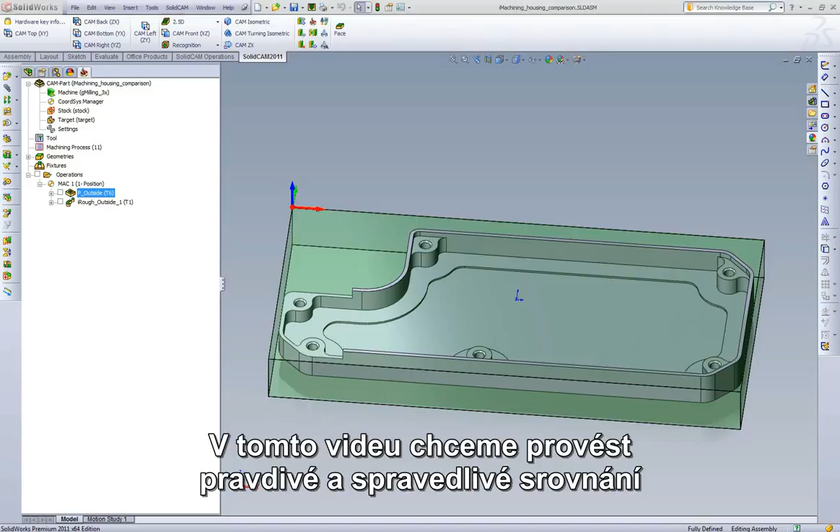In this video, we want to do a true and fair comparison of standard offset style strategies and the iMachining toolpath. And then we'll also compare the iMachining wizard and its feeds and speeds.

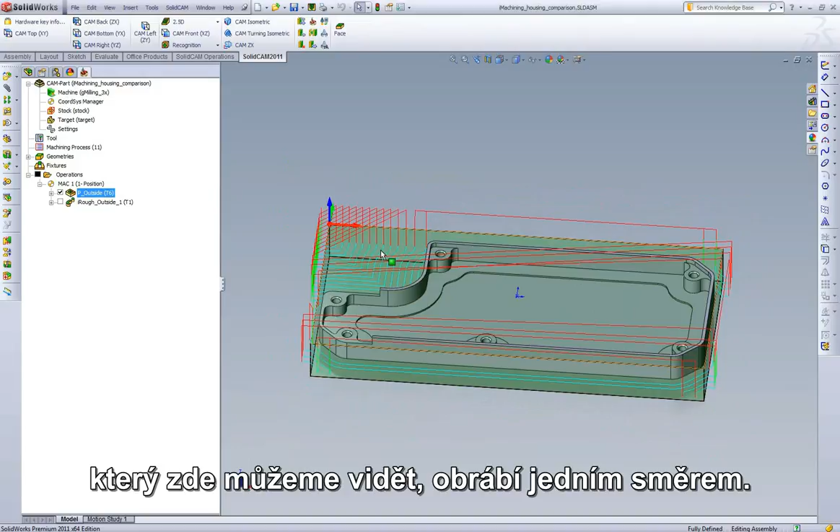What we have set up is a standard pocketing toolpath cutting the outside of our part. This is a standard parallel offset, as we can see, in one-way cutting. The second operation we have set up is an iMachining toolpath for that same geometry.

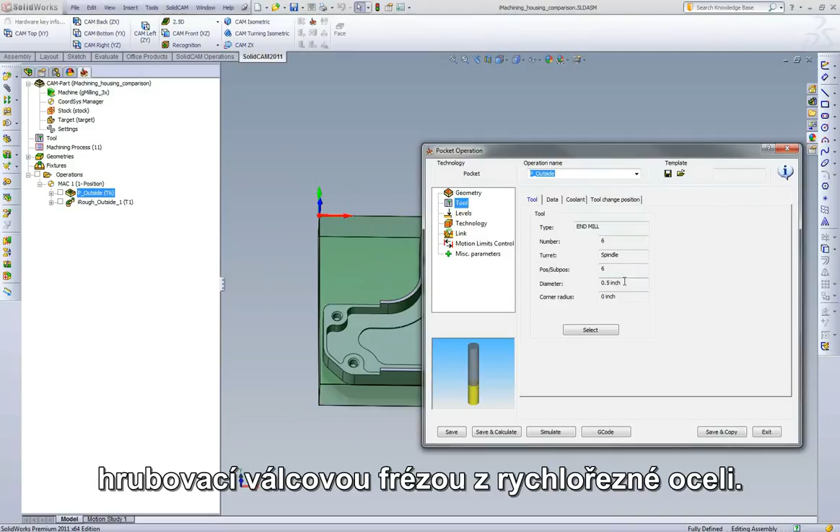So let's go to the pocketing toolpath and pick some real-world feeds and speeds. What we have here is a 1/2-inch, 4-flute end mill. Let's say we'll start out with a high-speed steel 4-flute roughing end mill, cutting steel. If we were to pick real-world feeds and speeds, assuming we're not doing high-speed machining, cutting steel, we'd probably run around 100 surface feet and pick something around 4 thousandths chip load. This ends up working out to roughly 760 RPM and a little less than 12.5 inches a minute.

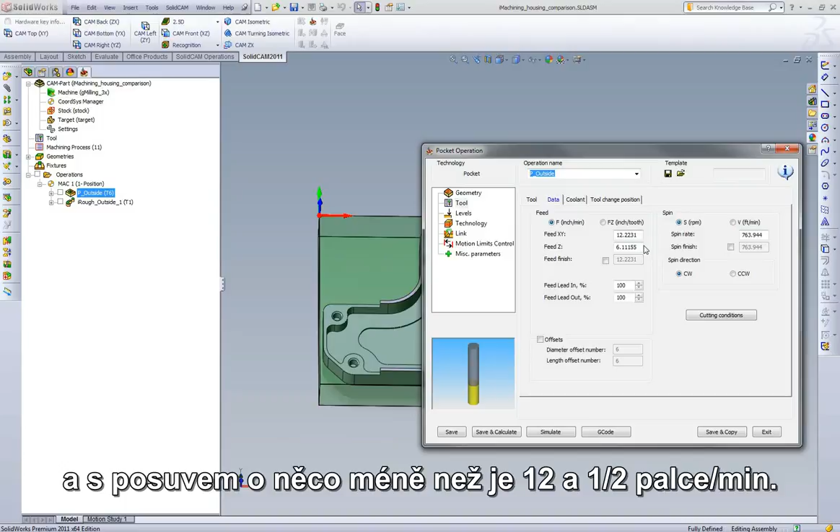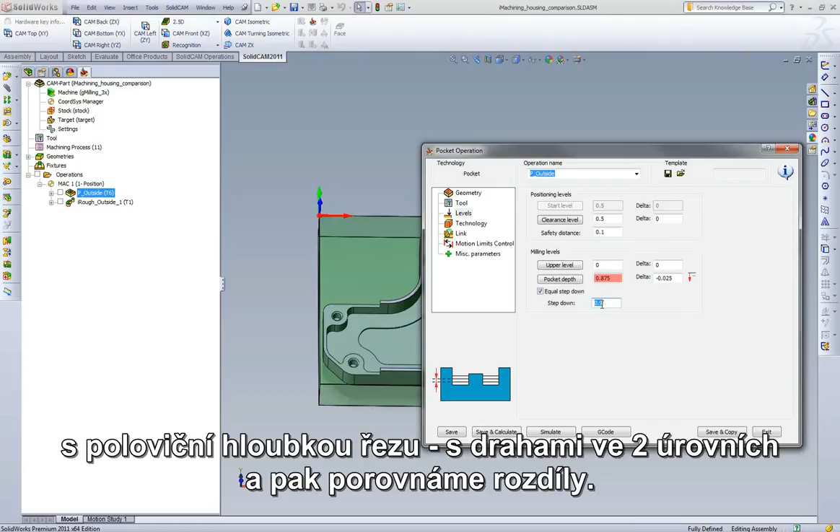If we were using a roughing end mill, chances are we'd be able to do this cut in one depth of cut. It's 875 thousandths, and we'd most likely get away with it. So what we'll do is compare the cycle times for this feed and speed at one depth of cut, and then cut the depth of cut in half and do it in 2 passes to see the difference. We are using a 60% step over on this part.

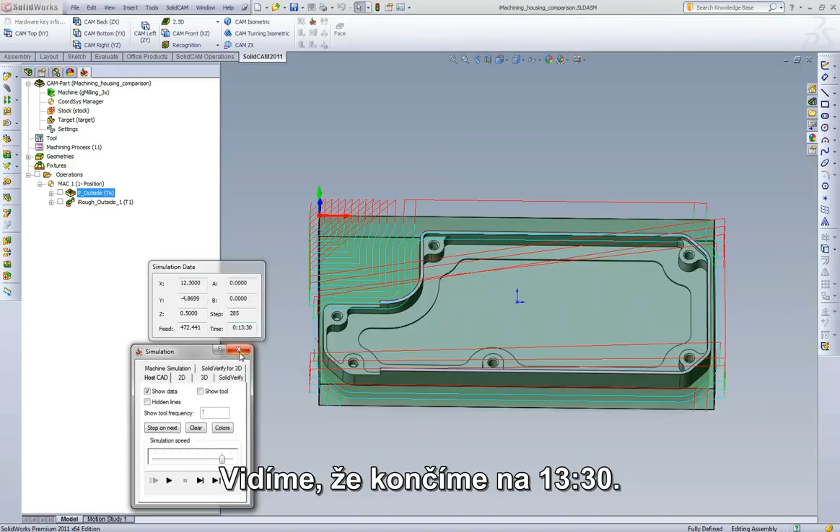So if we save and calculate and go to our simulation, we can see here we have our feed rates and our running time, and we'll just quickly play this toolpath. We end up with 13 minutes and 30 seconds, roughly 13.5 minutes.

If we were to change this cut and use, let's say, an equal step down and a half, which will give us 2. If we were to go and play this, we end up with almost 25 minutes worth of cycle time to machine this outside steel part.

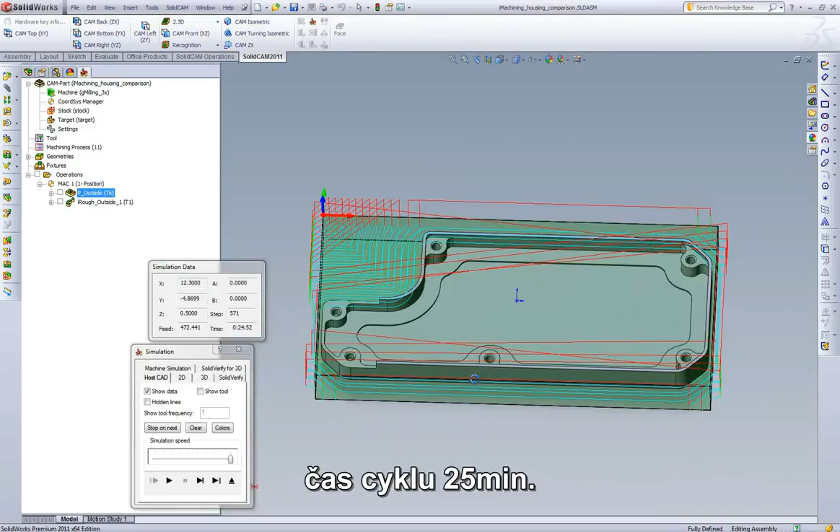To give you an idea of the size of the part, it is roughly 12.5 inches by 6 inches long.

Now let's go take a look at if we use those exact same feeds and speeds, the 763 RPM and the 12.5 inches a minute, with an iMachining toolpath. What are we going to get?

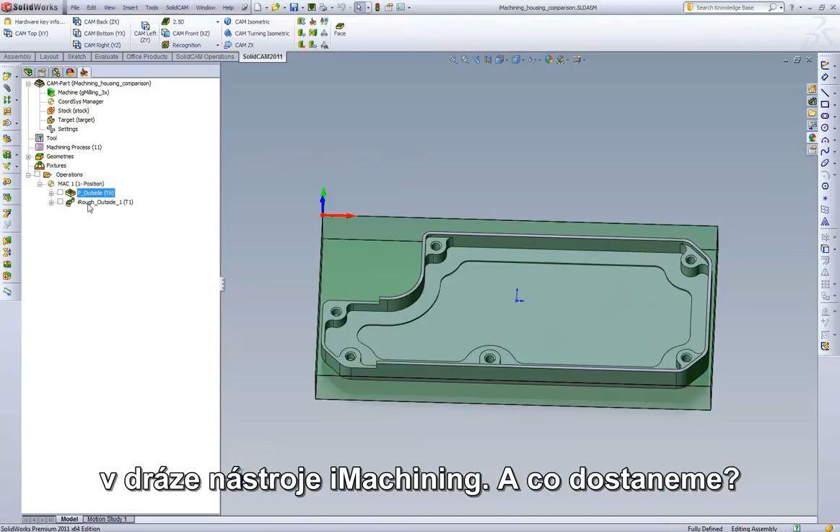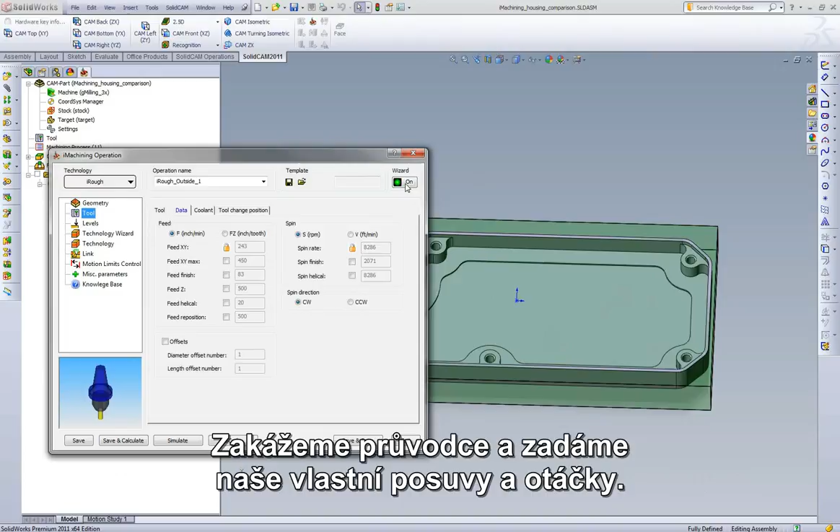Most high-speed machining toolpaths on the market today will tell you that most of their strategies need to be using high-speed feeds and speeds to be more beneficial than standard style strategies. In iMachining, we don't believe that. So what we're going to do is disable the wizard entirely and run our own feeds and speeds. We're going to pick an RPM of 763 and a feed rate of 12.5 inches.

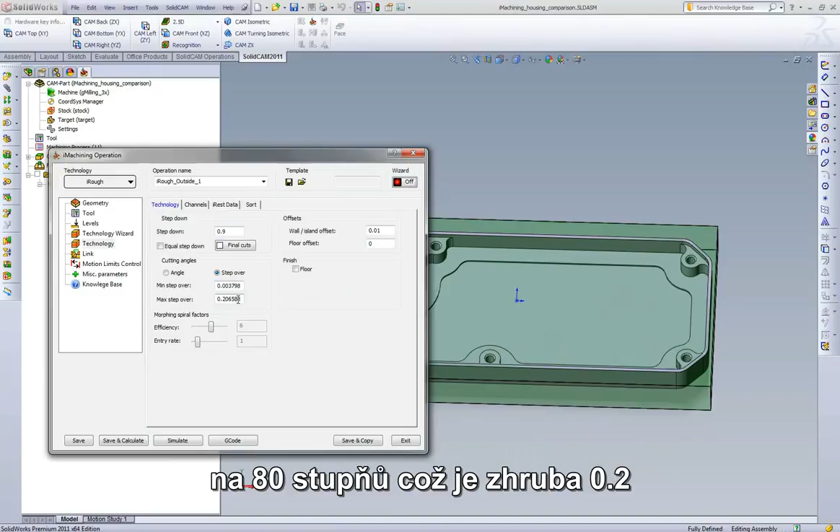Going to go to our technology. We're going to do one depth of cut. Since we're using a roughing end mill, we're going to maximize the step over, which at 80 degrees is roughly 200 thousandths. And since we're also trying to mimic what we get in parallel strategies, we're going to pick a bigger minimum cutting angle. We'll calculate this toolpath, run to our simulation, and we'll see what we get.

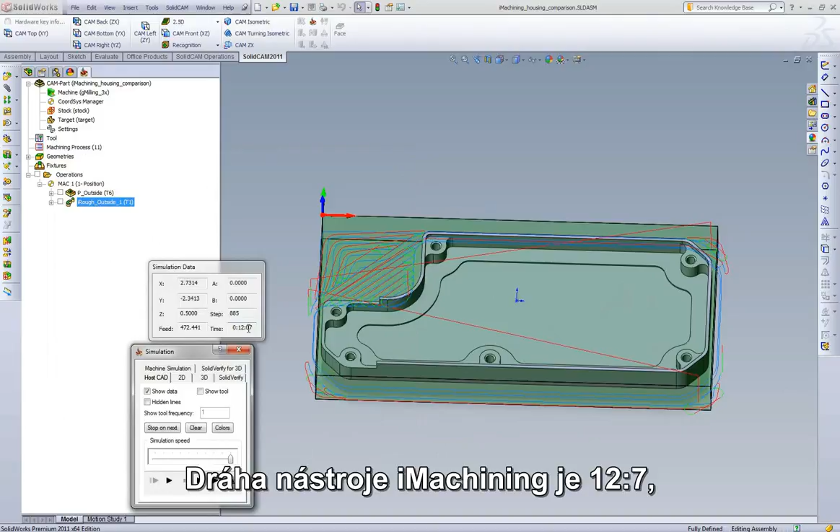We see the iMachining toolpath is 12 minutes and 7 seconds, roughly 1.5 minutes quicker than even the standard pocketing or offset strategy with the same step over, feed, and speed.

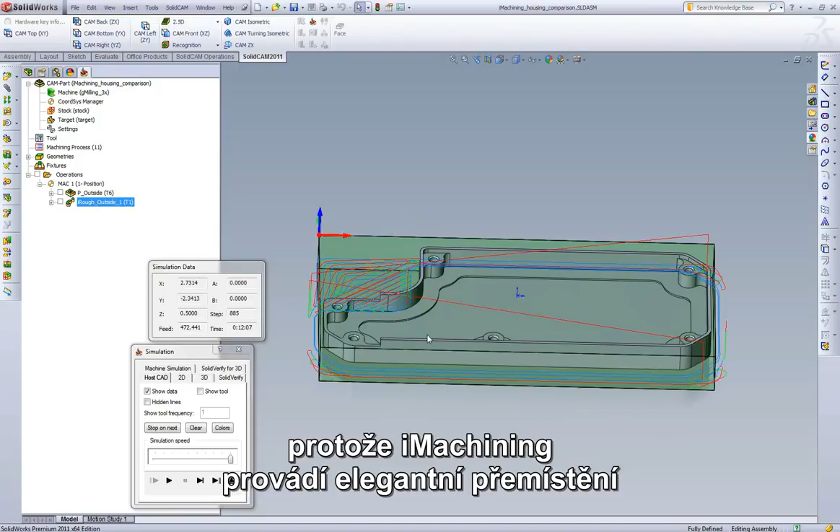Now, how does iMachining do this? It does this through a couple things. First, as we look at the toolpath, we see there's very little clearance and retract movements. Because iMachining is doing smart repositioning and always staying in the cut, as we look at this part, we're not wasting any feed Z moves, and we're not wasting any clearance moves. So you're getting a very big optimization just by keeping the tool down inside the cut the entire time.

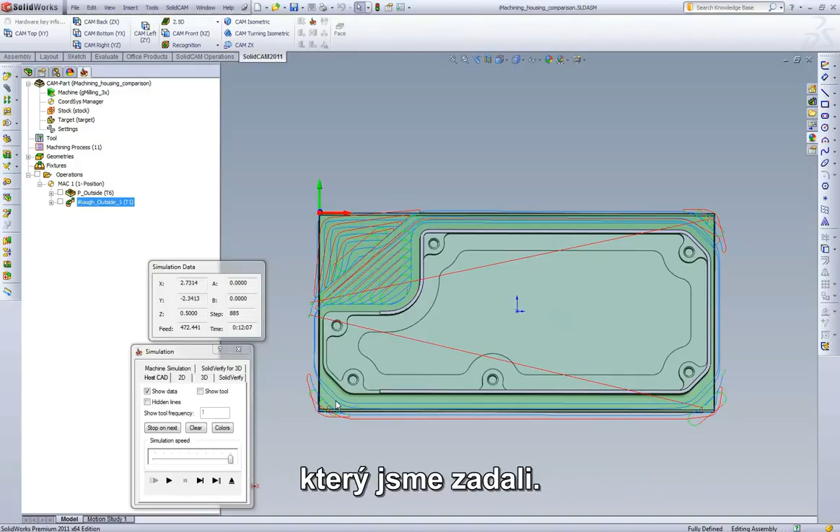The second thing we do is, we know we're not always going to achieve the step over that the toolpath asks for. And when that happens, we're automatically adjusting the feed rates to handle that. So even if we were to start single stepping this, we can see in the beginning as it's entering the cut, we have less step over. So our feed rate's actually a little bit higher, and it gets up to 17. As we hit the full depth of cut, you can see we're right at roughly 12.5 inches per minute.

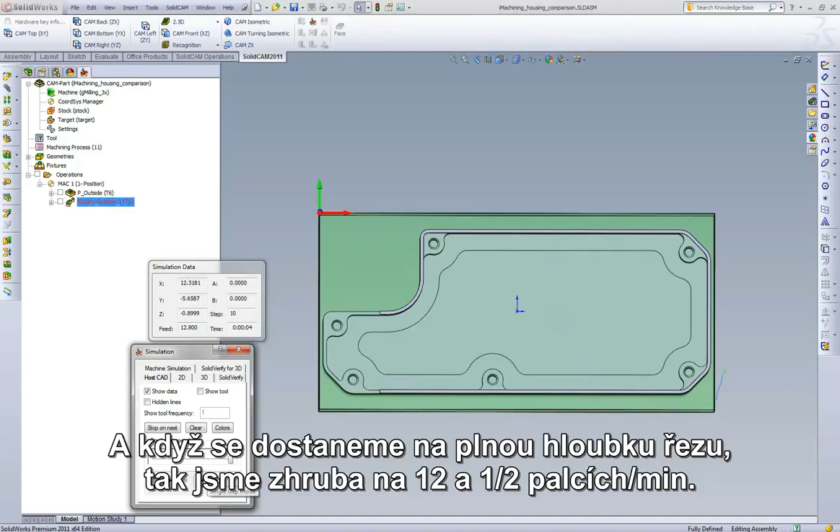So iMachining is being intelligent. It's getting rid of the repositions. It's staying in the cut the entire time, and it's adjusting the feed rate when the step over or the width of cut is falling below what we specify. So very efficient feeds and speeds, and you get a very nice toolpath. This is also going to be better for the tool in the long term because the tool's staying in the cut more.

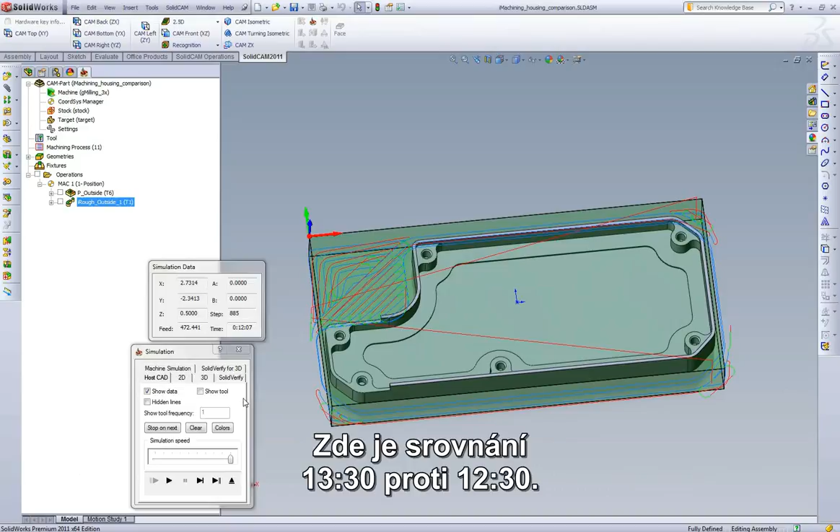It's not entering and exiting as much as it would with standard pocketing or standard offset cutting. So this is a comparison of 13 minutes, 13 and a half, to 12 minutes. Not a huge difference, but even using the same feeds and speeds that any shop is used to, we're going to see a benefit with iMachining.

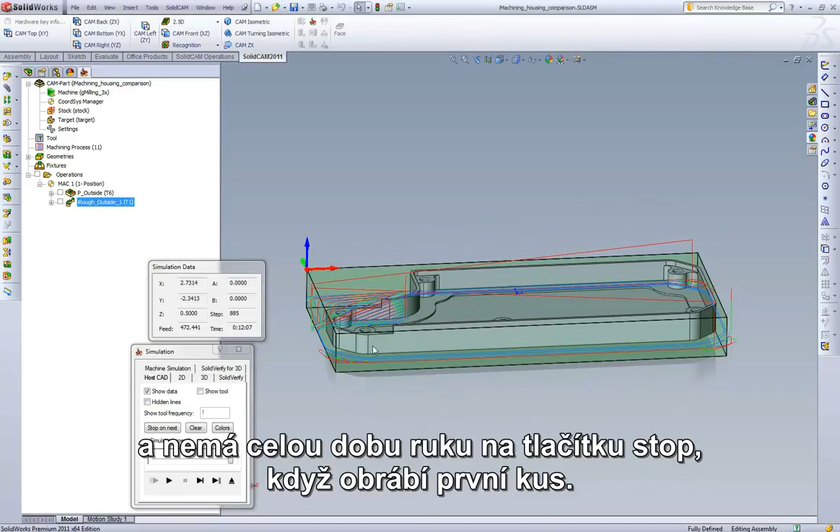And not to mention, when the tool path is running out on the machine, as an operator you're going to feel much more comfortable not having all of those Z clearance retracts and plunging all the time with your hand on the cycle start button when you're running the first piece. So iMachining also gives you a better feel at the machine because the tool path is staying down and it's cutting more intelligently.

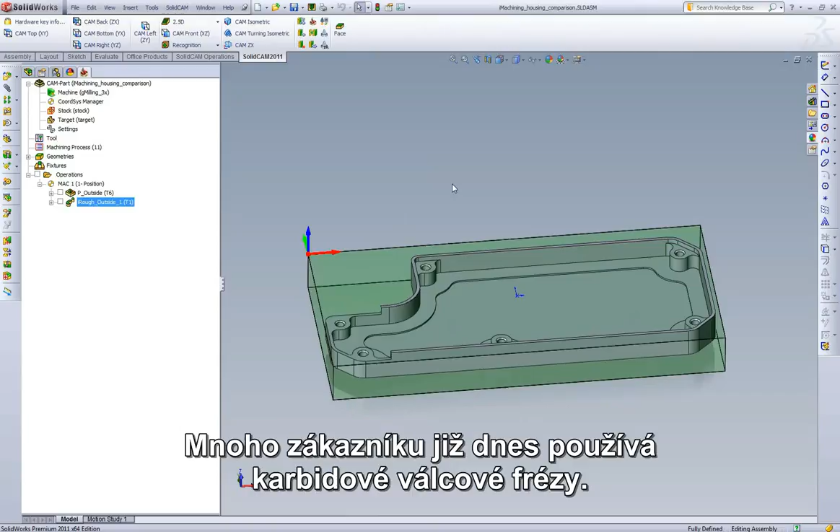Now let's also take a comparison of what happens if we were to try and do, let's say, high-speed machining with a carbide end mill. Our customers are using high-speed or carbide end mills today. So let's say we went back to this pocketing end mill. We're still going to use a 1/2 inch. We're going to still pretend it's a 4-flute carbide end mill.

Now we're going to switch things up a little bit. Most likely if we're running carbide end mills in steel, what we're going to do is run more surface footage. And then we're also going to run shallower depth of cuts because we're not going to take the full 900 thou at that step over.

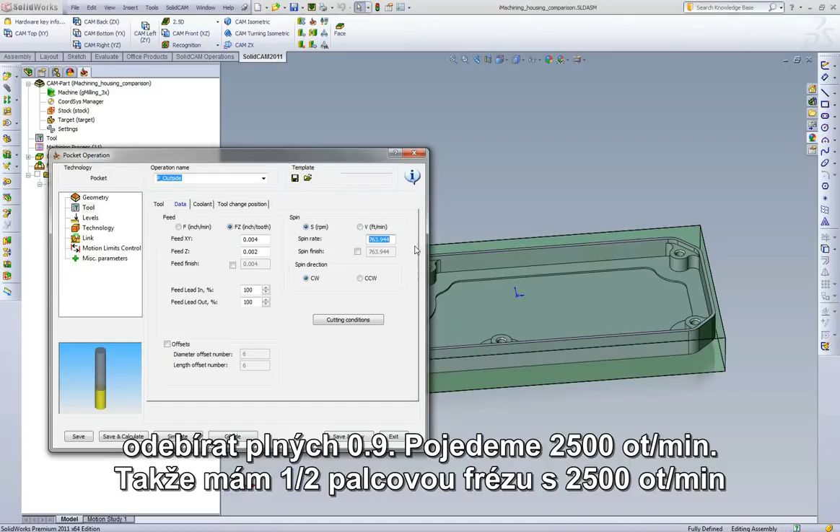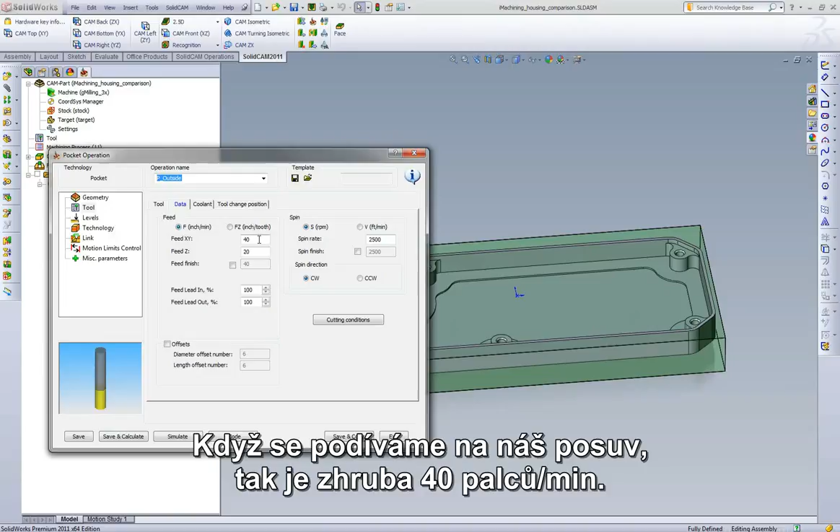So let's say we want to run something like 2500 RPMs. So a 1/2 inch end mill at 2500 RPMs works out to 330 surface feet, which is a little on the high side for steel, but for people doing high-speed machining in steel, really not that high. Definitely doable. So if we look at our feed rate, we get roughly 40 inches a minute. So 2500 RPM, 40 inches a minute.

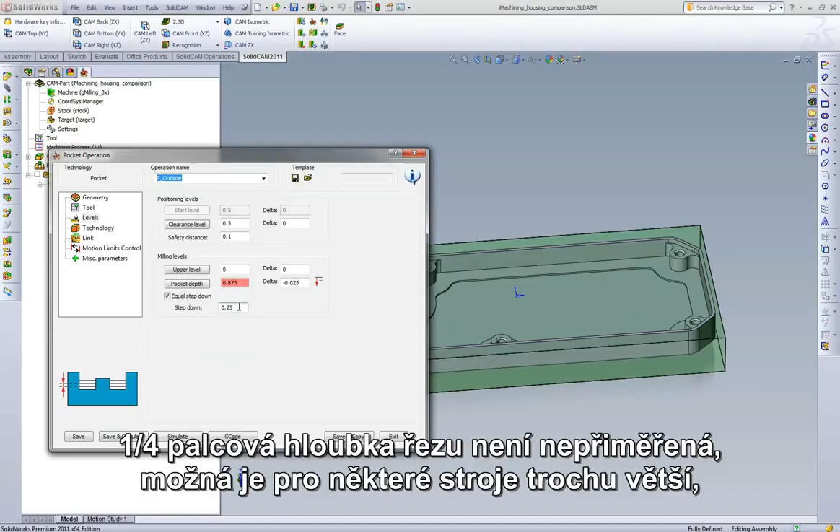We'll go to our levels, and what we're going to do is pick a 1/4 inch depth of cut. I personally feel that's a little heavy with a 4-flute 1/2 inch carbide end mill, but it really depends on your machine, the rigidity, the holder. So a 1/4 inch depth of cut is not unreasonable. Maybe it's a little high for some machines, and even other machines might be able to go a little bit deeper for sure. So let's calculate this tool path, and we'll see what cycle time we get.

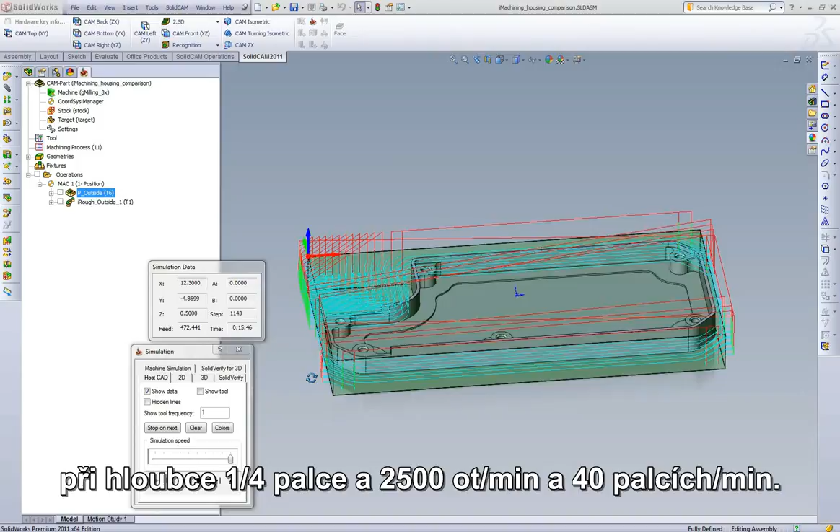So if we see here, we're sitting at 15 and a half, almost 16 minutes. So this is a cycle time at a 1/4 inch depth of cut at 2500 RPM and 40 inches a minute. We can see basically the same tool path we had the first time. Now we're just trying to go with a little shallower depth of cut, more RPM, higher feed rate.

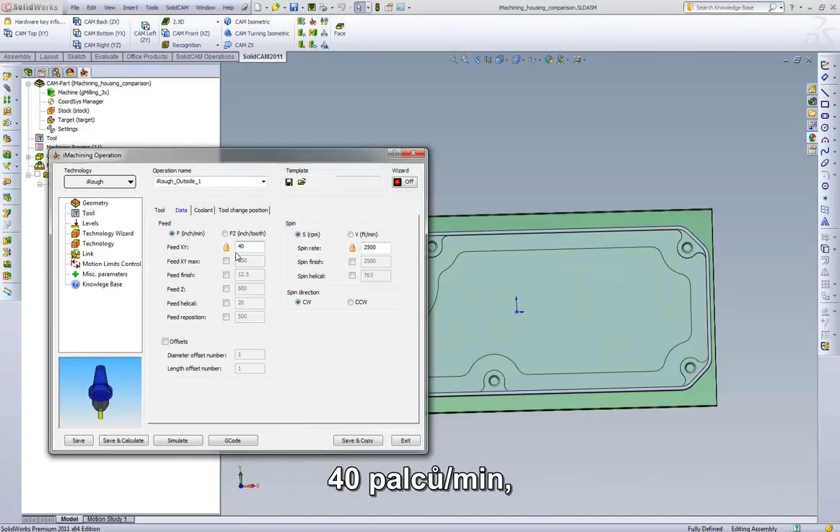Now let's go to the iMachining toolpath, and we'll do the same thing. So we'll go to Tool. We were running 2500 RPM. We're running 40 inches a minute. We'll also mimic the same step over, so we'll pick a 1/4 inch equal step down, and we'll calculate the toolpath.

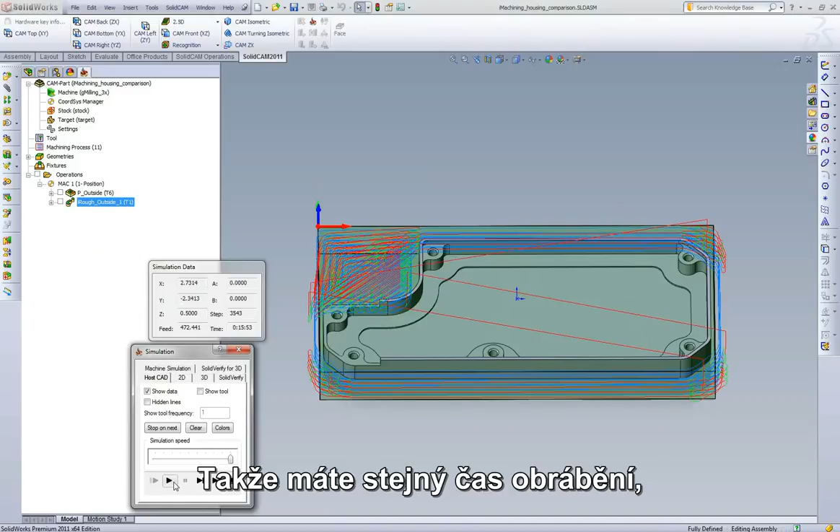15 minutes and 53 seconds. So basically you got the exact same cycle time going between standard pocketing with high-speed machining and iMachining. Yet we're keeping the tool in the material the entire time. You're getting less wear from the tool entering and exiting, and it's also doing smart repositioning.

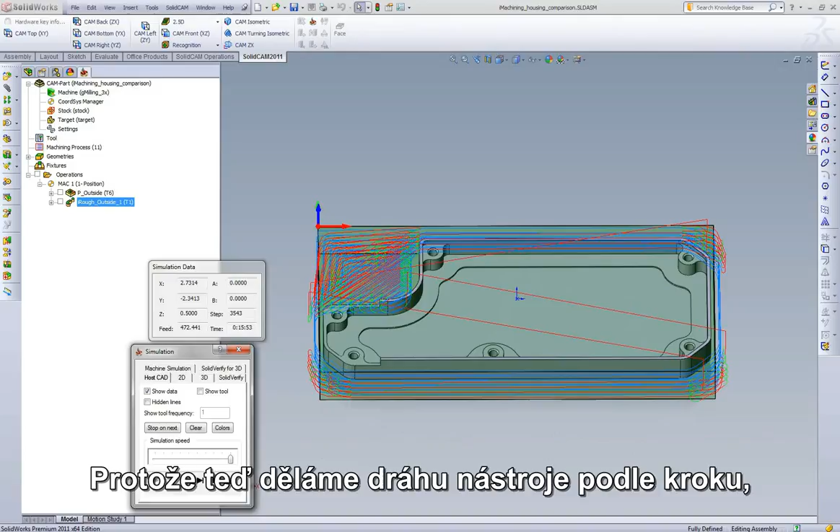Now let's do some comparisons on what iMachining's wizard would tell us to run. Because now that we're actually doing step over control toolpath, we can take this thing in one depth of cut. Not a problem at all.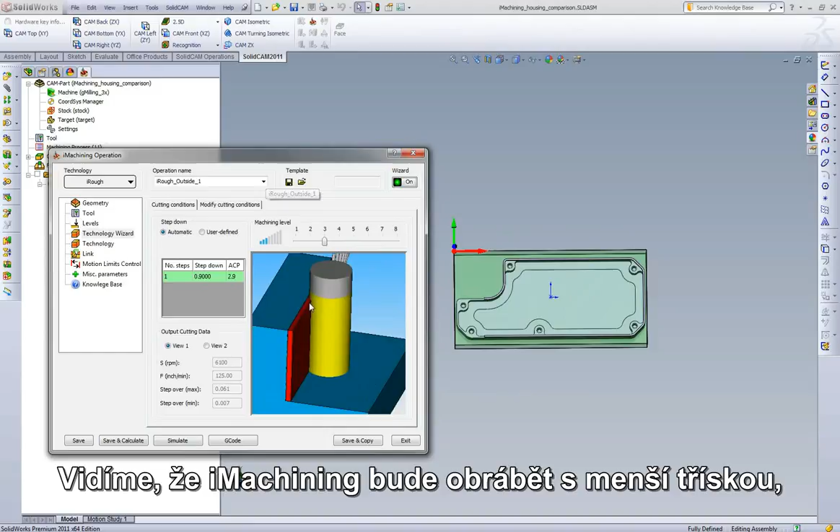So we're going to turn the wizard on, and we're going to take a look and see what the wizard generates. First, let's not go all the way up to level 8. Let's say we're trying to be a little conservative, and let's step down to level 3. Now, when we step down to level 3, a couple things we're going to notice here. iMachining, unlike what we were doing with standard pocketing, is going to do a smaller radial width of cut.

This is because now we're doing full depth of cut, so we want to shorten up the width of cut, that way we're not getting into a heat condition. When we're also doing this, we're going to adjust the feed rate for chip thinning, so we're running a constant chip thickness. Now, iMachining does some different things than what we do in standard pocketing.

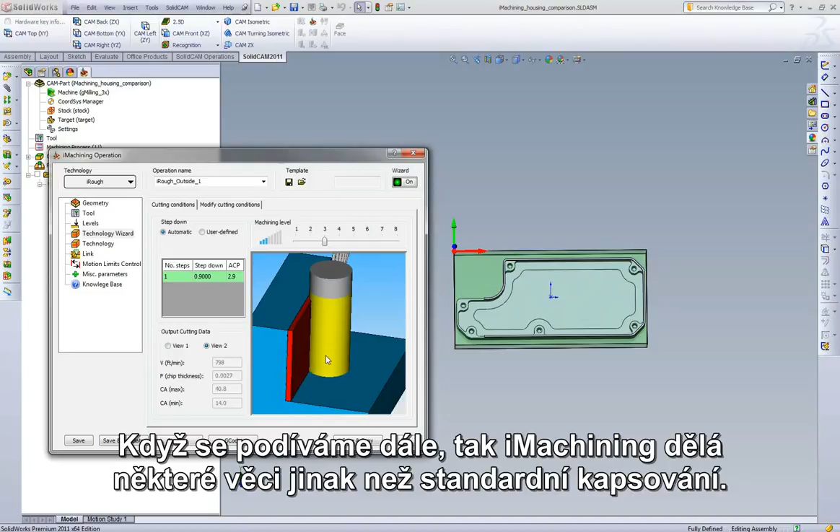When we're using carbide end mills, we're going to try and hold 2 thou and 7/10 of a chip thickness. So what this means is at the 61 thou step over, the 125 inches is going to meet that 2 7/10 chip load.

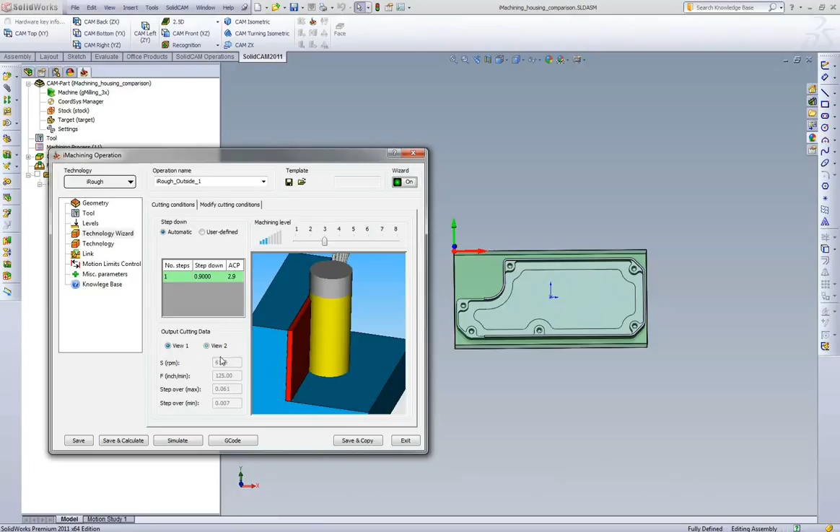Now iMachining is going to run up to 6100 RPM. This is going to be no problem with iMachining at all. The biggest reason, as we know with standard offset style strategies — when does the tool make the most heat?

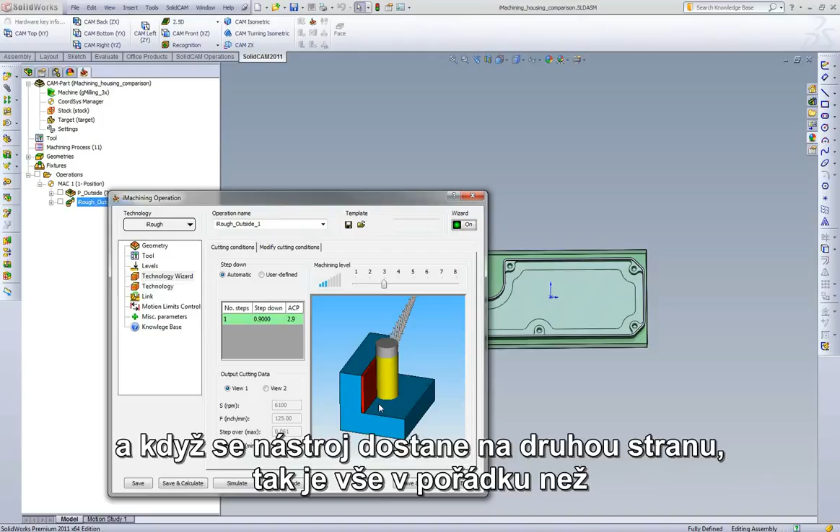When it goes into the corners. We've all seen as the tool path runs into the corner, you can see it smoke up. We've all basically had the coolant just dripping on it, and we know as it's cutting around the outside, it's nice and fine. As soon as it goes into a corner, the tool starts to smoke and the coolant evaporates, because the heat generated in the corner is what's dictating the entire tool path for us.

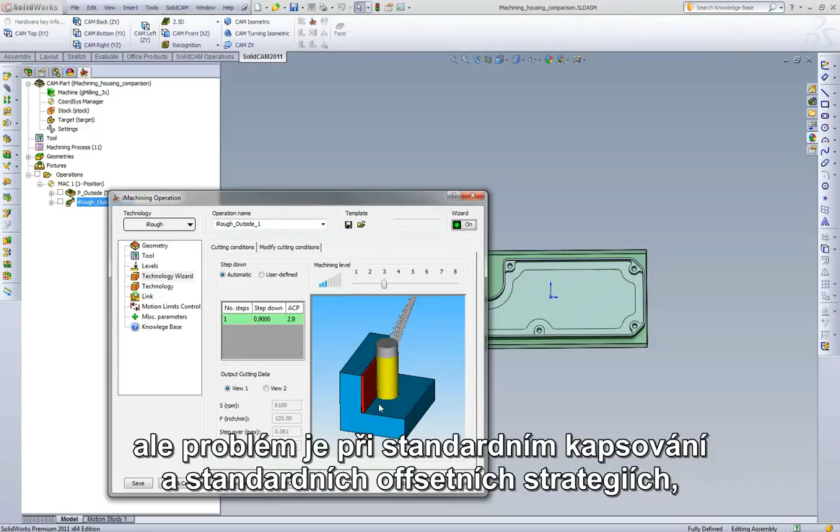Even though we knew if we were running in a straight line, we could run 6,000 RPM in steel, that wouldn't be an issue — not at this step over, not at that depth of cut. But the issue is, in standard pocketing and standard offset style strategies, we're getting too big a step over in the corner, chip thickness is going through the roof, and we're slowing down the entire tool path because of it.

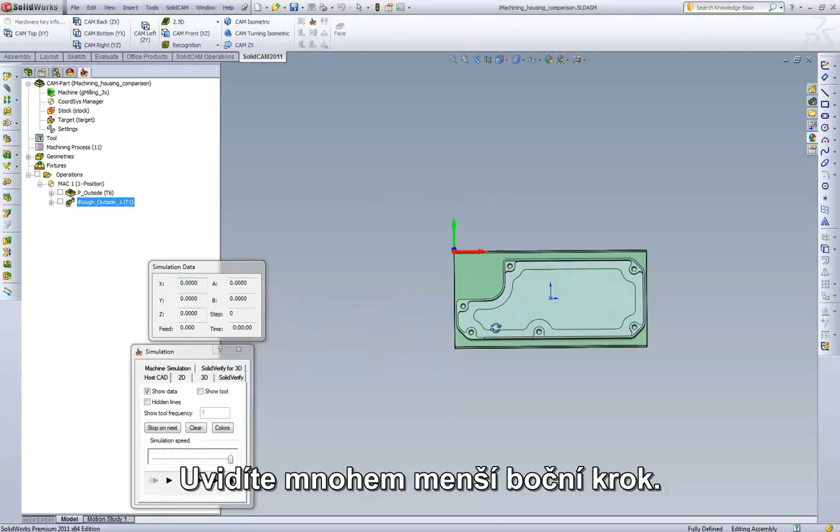So if we looked at what iMachining would do for this strategy, at this step over, we'll see what time we get. Now what we're going to see is, one, you're going to see a lot smaller step over. But we can see what happens — we go all the way down to 4 minutes of cycle time with iMachining.

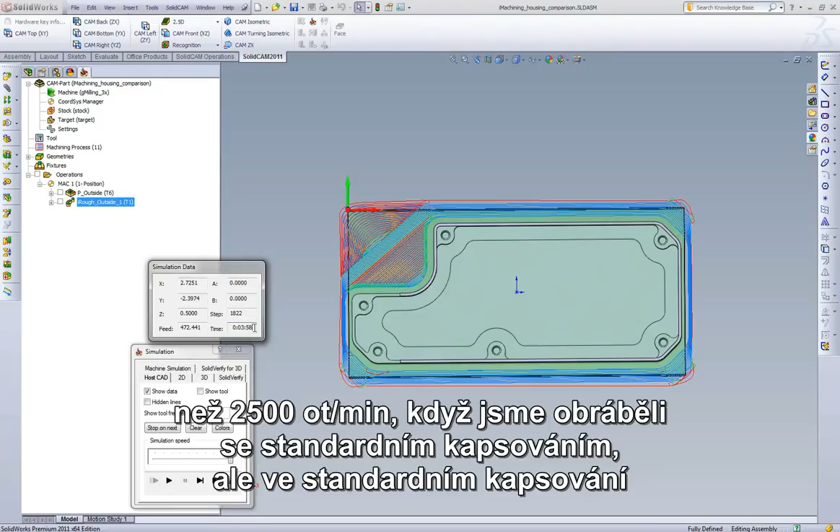That's still a very, very conservative feed rate and RPM with iMachining. We do have to remember, this is much higher than the 2,500 RPM we were running in standard pocketing, but we're limited in standard pocketing and offset strategies because of the corners.

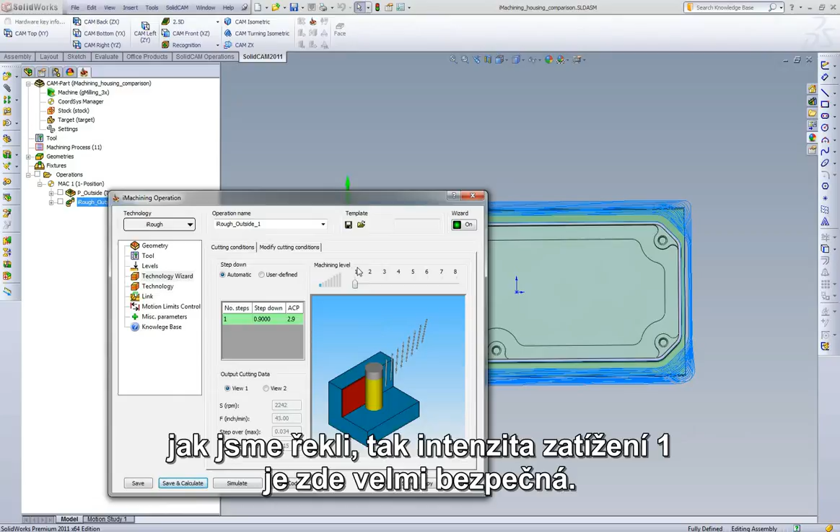Now, even if we were to take iMachining down to, let's say, level 1, which would get us down to roughly that 2,500 RPM range, a little less. As we say, level 1 is here to be very safe. This works really good when you have a part that's maybe hanging out in there and you really don't have a lot of clamping force, or your tool is hanging out very far.

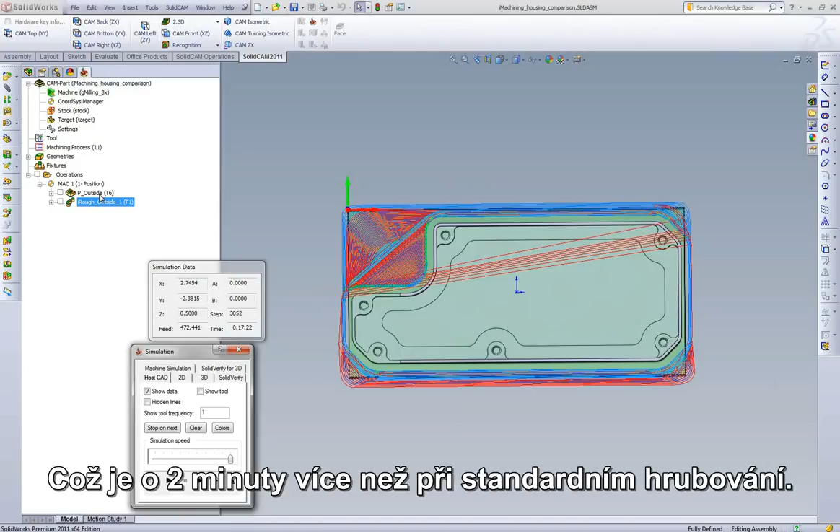Now even if we do this, we see we get the 17 minutes. So that is 2 minutes more than what the standard rough cut did with the standard offsetting. Yet we're actually still running a little less RPM and feed rate than we were in the pocketing, because this is only 2,200 RPM as opposed to 2,500.

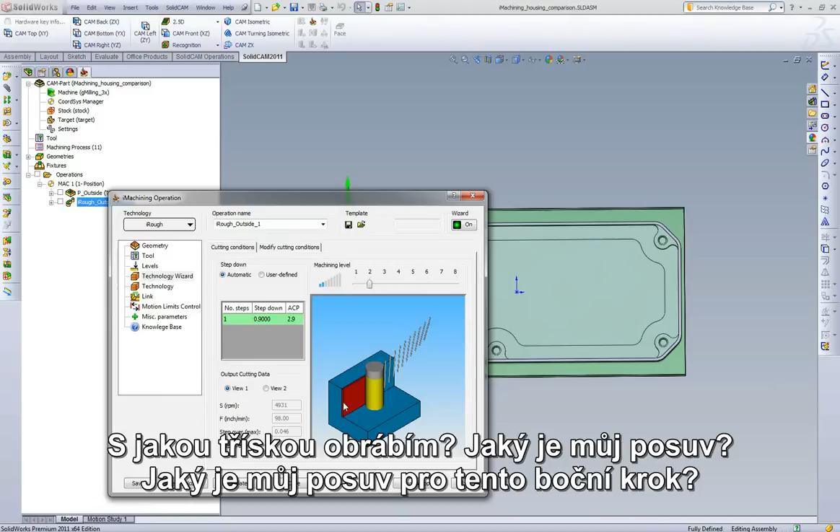So you can really see that with iMachining, we're giving you a lot of choices here with the feed rates, and the user doesn't have to worry about all that synchronization — what chip load am I running, what's my feed rate, what's my feed rate for that step over? iMachining is taking care of all that.

And if we were to calculate level 2 and just see our feed rate there, we go down to 6 minutes.

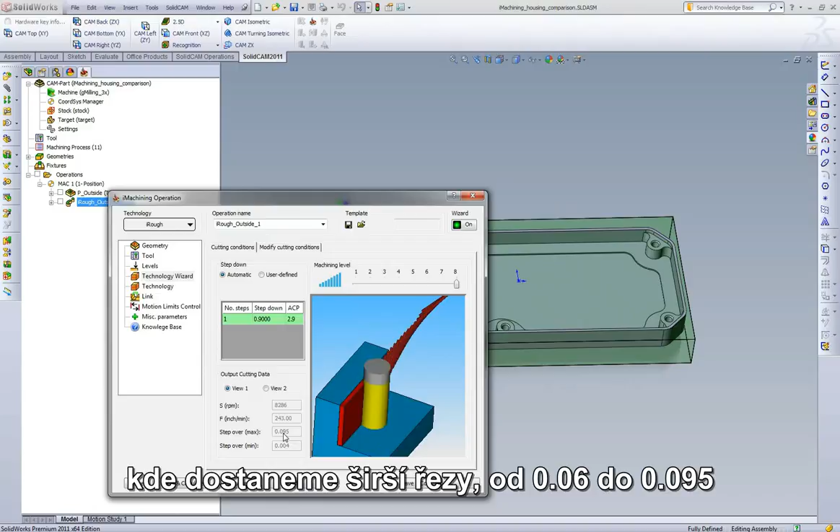And for the really aggressive customers, we can go all the way up to level 8. You can see level 8, we get a little bit wider cut — we went from 0.06 to 0.095, and now we're up at the 8,000 RPM range. If we calculate this tool path and simulate, we go all the way down to 1.5 minutes.

So with iMachining, you have a huge range of strategies that you can go with. You can run the same feeds and speeds that you run normally, and you'll still get better tool life, more efficient cutting, and better results on the tool and the machine.

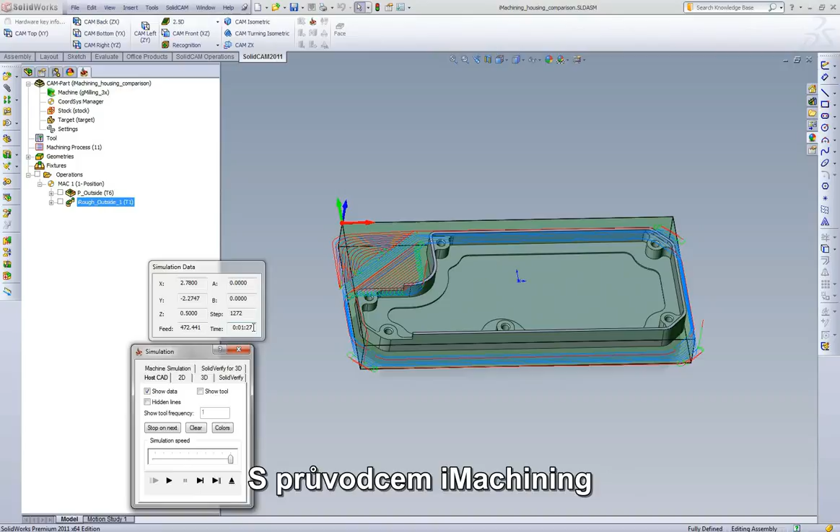With SolidCAM's iMachining Wizard, even level 1, 2, or 3 is going to beat the cycle time of what most customers are doing with machining today. And it's very easy, as we see going up to level 6, 7, or 8, to achieve those feed rates because iMachining is managing all of this stuff.